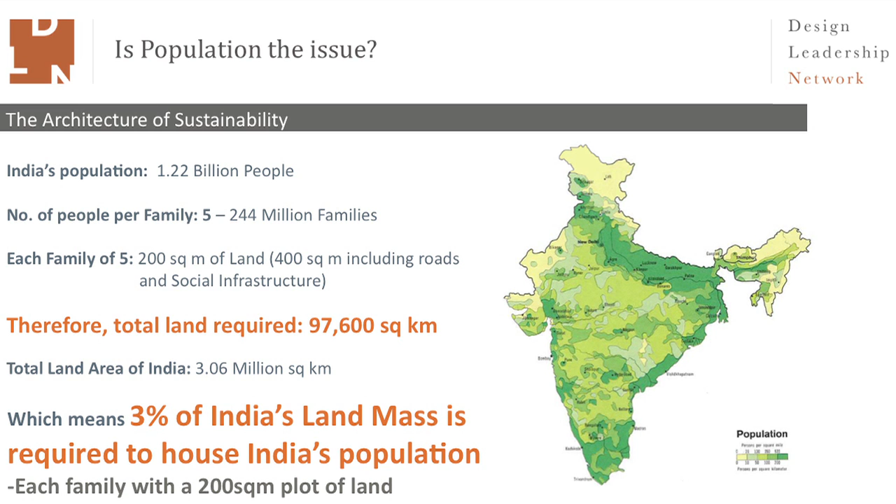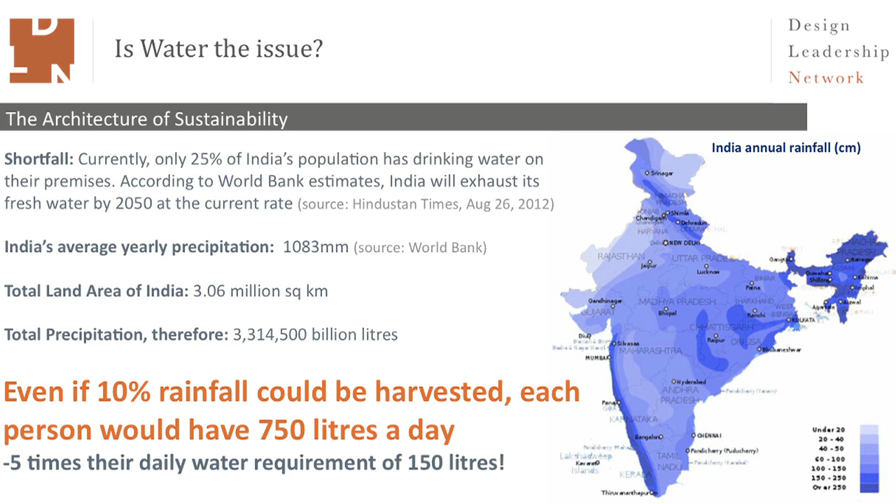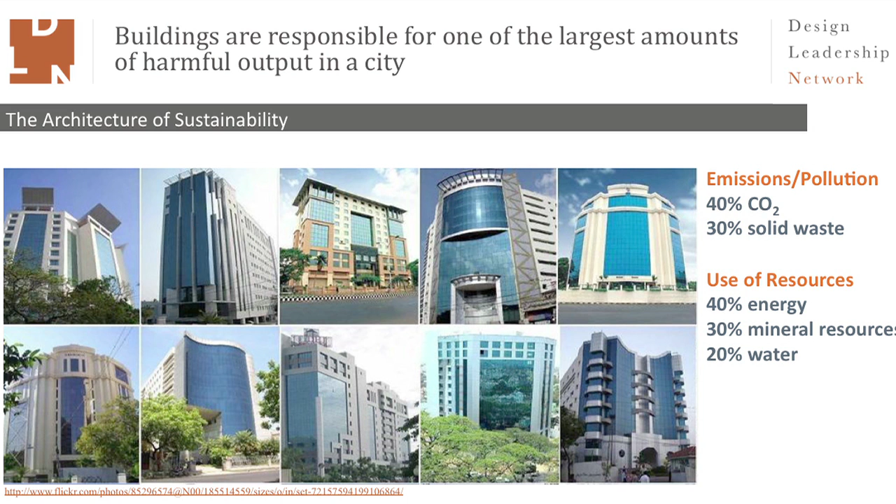India is a country where we have enough resources, enough land, lots of people, as you all know, and yet somehow we don't seem to have enough in our cities. What we build today are some kind of mental imagery of what is really required for India, and I'm not entirely sure where this confusion comes from, because this is not what we did in the past.

We've had traditionally an architecture stemmed in our history, in cultural context, and materiality which has emerged from the region, because in India traditionally we've always had scarcity of resources for the common man, at least.

This is the architecture of Morphogenesis. This is something where we build sustainability as the backbone of all our design thinking. We take standard acceptable norms of good green architecture, and we mix it with our understanding of what was green architecture when it wasn't termed green architecture.

We look at what the aspirations of the global Indian are today, and what is the affordability that is desired of our architecture today, and what is the imageability, and what is the image that a global Indian is looking to project. Using all of that, and keeping sustainability as the backbone of our thinking, we build buildings.

The first one you see on the left is Pearl Academy of Fashion, which is a hybrid building, a typology mostly available in developing nations, which is not mechanically centered on air conditioning. And then some of the other buildings you see are modern day requirements of a global India, which has corporates, IT buildings, and research centers.

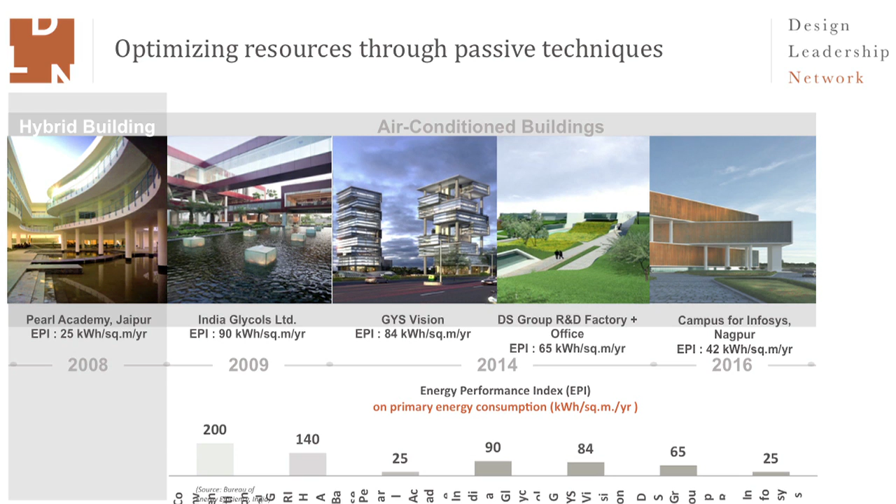And in all of those, you'll see those little blocks at the bottom. We consistently try to bring the energy used by the building down to much below the acceptable green standards. So this is the Pearl Academy of Fashion, Jaipur.

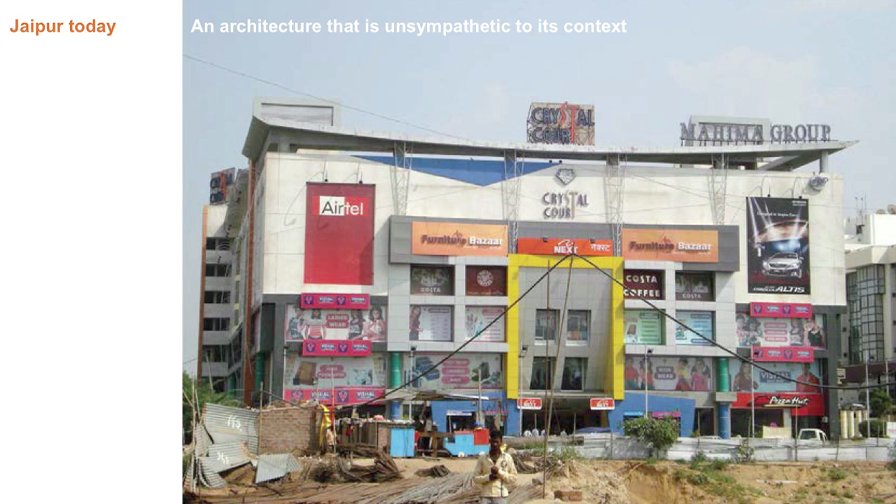This was a project built for less than $300 per square meter, based in Jaipur, in Rajasthan, where most buildings look like that today. This is the Pearl Academy of Fashion.

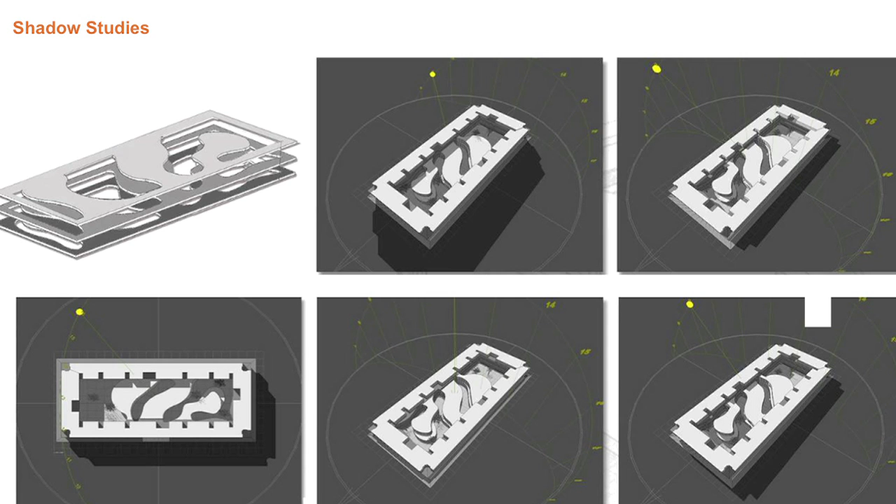This was built on basic passive design principles, using traditional typologies like a second skin made of what we call jalis in India, essentially perforated walls, and using subterranean water collection—architecture which has a term called baoli, where in this extremely hot climate, rainwater was harvested subterraneanly and stored for use, as well as shadow analysis, because this is one of the cities that touches 50 degrees centigrade in the summer. So shade is very important, especially considering it's a hybrid building.

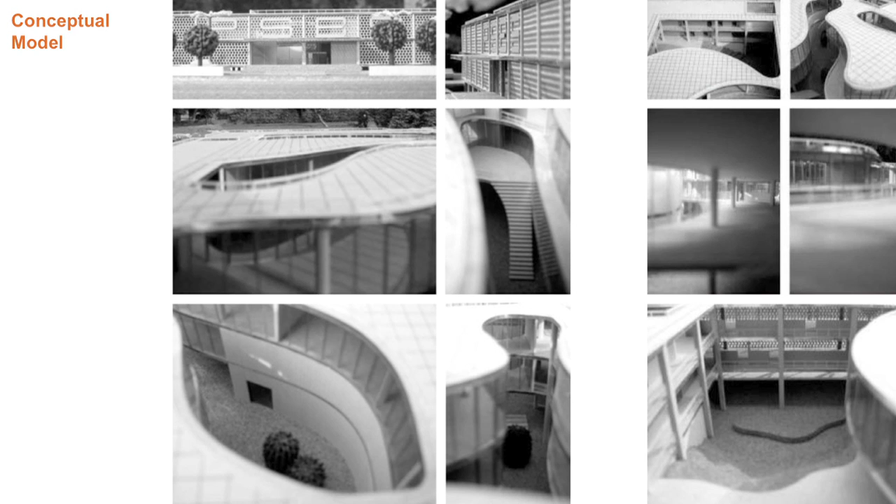These are some of the images of what a fairly rectilinear facade on the outside breaks out into a playfulness, which is intended in one way and generated in another.

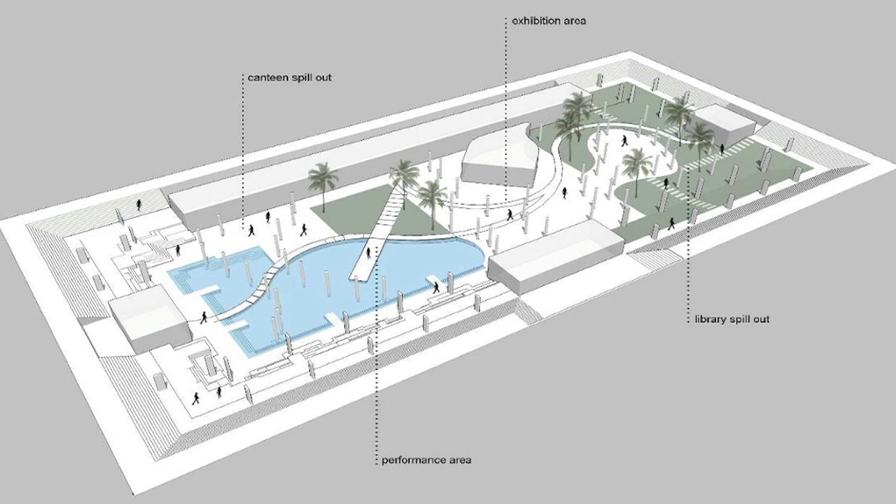These sections show the baulis that I talked about, where the incident water on the site is collected, as well as the sewage treatment plant water is recycled and brought to the base. Evaporative cooling is used, and this is the base of the building, so the entire building is kind of floating above a subterranean water collection point.

These are traditional insulation techniques. Earthen clay pots are used for insulation, which brings the temperature substantially down, not just a couple of degrees, but maybe 10 or 12 degrees. So it does the job of air conditioning. This is an architectural section that shows how earthen pots are used.

This is what the fenestration does, in addition to being the second skin, and also the sewage treatment plant water comes down as drip irrigation on the cementitious second skin, but it also creates interesting opportunities to work with shade and light. That is the building just before it was handed over.

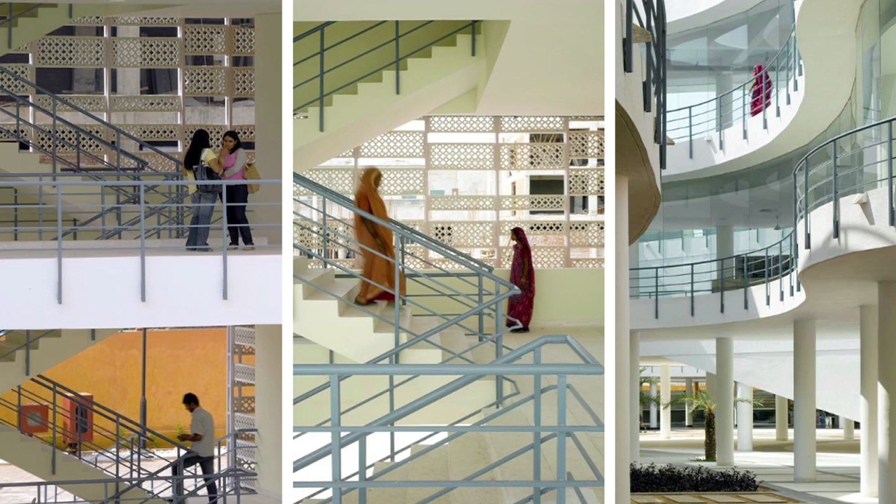Various images, very simple building, paint and plaster, cementitious jalis, all material sourced within 200 kilometers. Stone that was used very sparingly is all local to Rajasthan. This is an image of the water collection point at the base of the building.

And this is the bauli, which is the traditional step well created to save water. Normally, because it's so hot, there were places for social interaction created along it, so people can sit and by the use of evaporative cooling, also achieve a certain amount of thermal comfort. And as you see, it starts to get used.

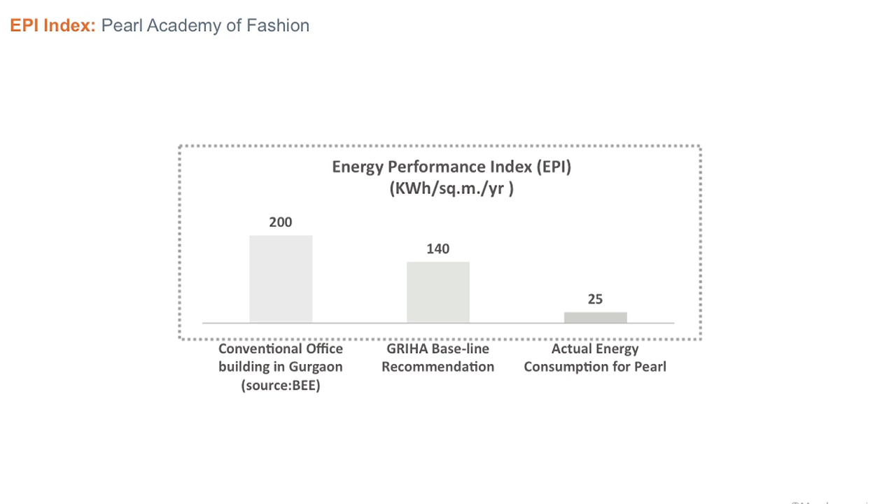And the energy EPI achieved is only 25, whereas the acceptable green norm in India is 140.

This is a completely different kind of building, for the modern day typology which did not exist 20 years ago. This is an IT campus. Infosys is a company that most of you probably heard of, it exists in America as well. These are special economic zones where people go in for several hours of confinement to the office building, and they are IT software programmers. These are usually located just outside a city because they are so large, almost like little townships themselves.

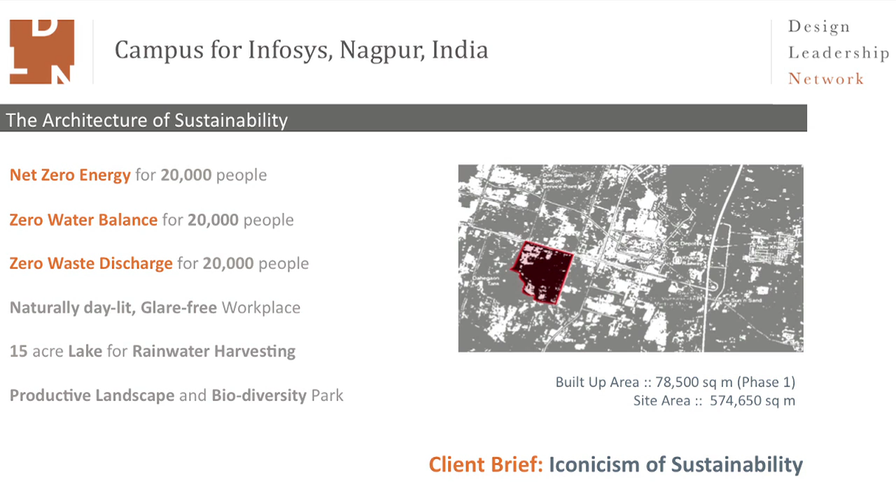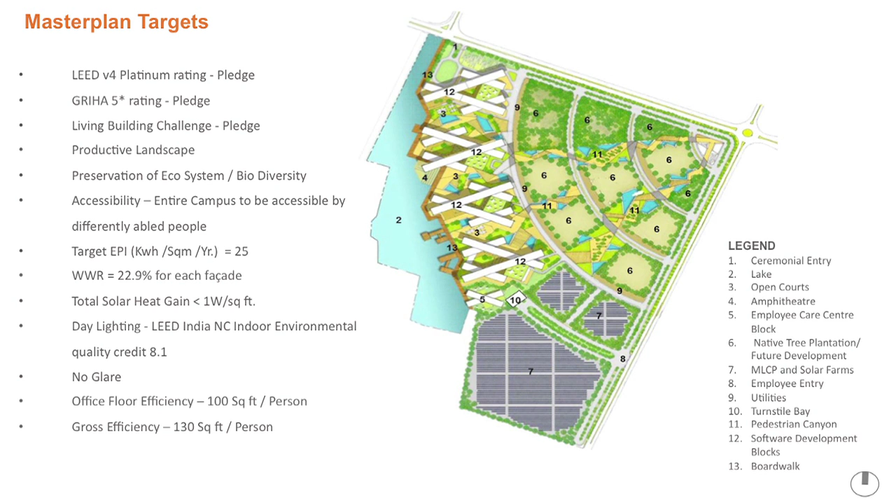Now we set out an agenda to achieve net zero energy for 20,000 people, zero water balance for the same number of people, and zero waste discharge into the system. So this is a master plan for 140 acres. We took advantage of the fact that it's located on a slightly sloping site, and all the water from the site was drained into it, which is then recycled and used for the entire 20,000 people.

So the form of this building came out of creating one ideal block, which was naturally daylit, glare-free. Using the 22.5 degrees north location on the tropic of this site in Nagpur, also rotating each of the blocks by 22 degrees on either side, we created a self-shaded kind of building, which is 100% daylit and 100% glare-free.

A lot of simulations were required to convince the engineering, all engineers in Infosys, but it passed through their grueling tests, and it's under construction now. So there are 4 of these blocks that sit on the edge of this man-made lake.

And the entire landscape is also a biodiversity park. There is a lot of diverse flora and fauna of this region, which has been used so that they do not use up extra water. So the landscape designing was also very crucial to achieving the result that we hope to achieve.

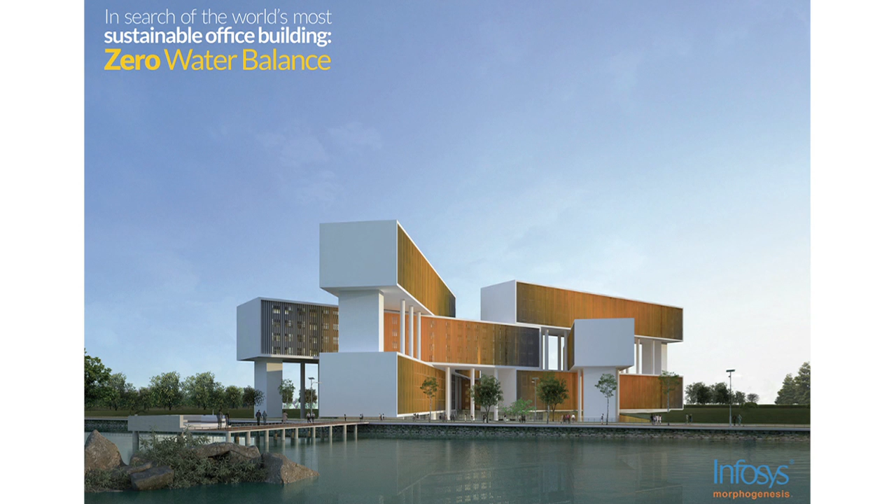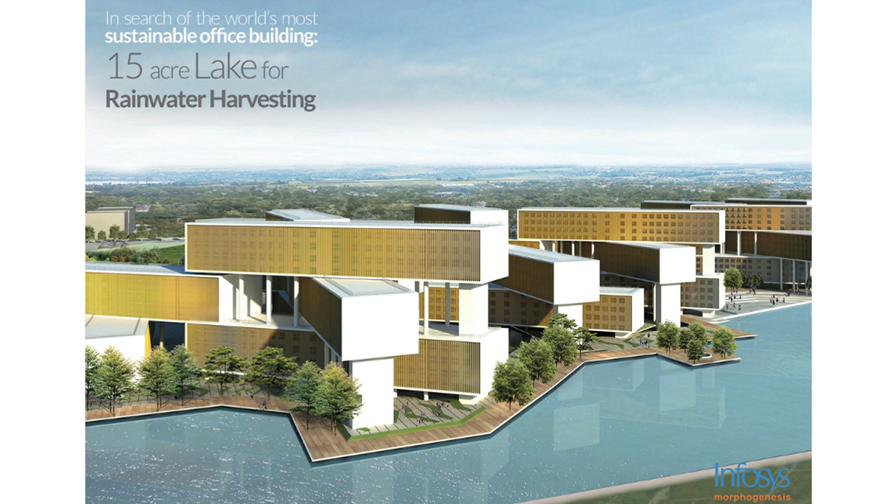So all the water goes into this and then gets recycled back into the building, so there is no water wasted. And that is what finally, when all the 4 blocks of phase 1 are up, that's what the building looks like. And this is an image of the rainwater harvested lake, which is at the base of the campus.

This is the third kind of project that I said we really do and passionately believe in, which is giving back to our city. This country has given us a lot, other than the fact that, of course, we are Indians, but it's given us a lot of opportunity in the last 18 years.

We have had fantastic projects to work on, starting from small art galleries to large IT campuses, to building cities. Literally, we build a city or two every year. We get a commission to do that. So it's given us so much opportunity.

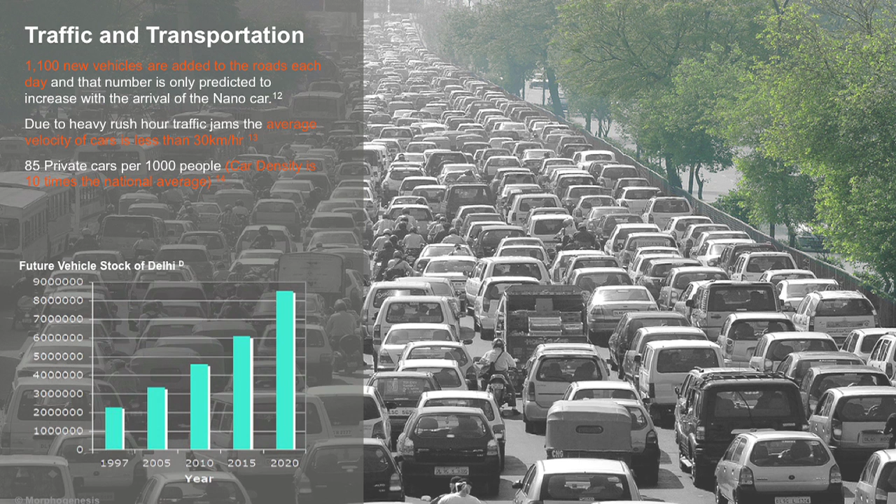So a couple of years ago, we started this program which we call Delhi Nalas. Nala is the name given to an open drain. An open drainage system was what drained all of Delhi historically. It was put together by the Tughlaq dynasty, one of the dynasties that ruled with Delhi as a capital. It connected all the monuments of Delhi, because the monuments essentially came up where there was water available, and then finally connected to the river Yamuna, which was the water source for entire northern India.

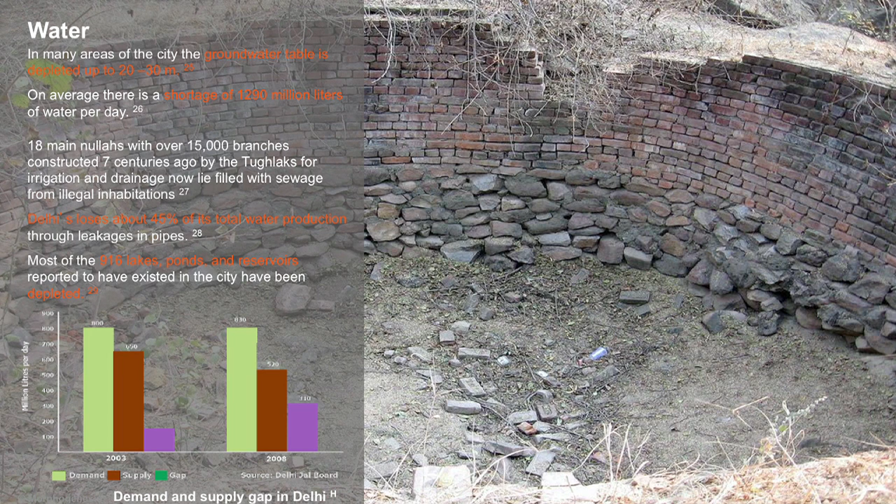Now most of these are either like this or like this, and these are not rare. When you walk through Delhi, this is what you see. And because essentially it was a drainage system of the city, it is everywhere, it drains the whole city. With 50% of the city's sewage going from slum areas, which are unplanned, directly into these, we have a huge issue.

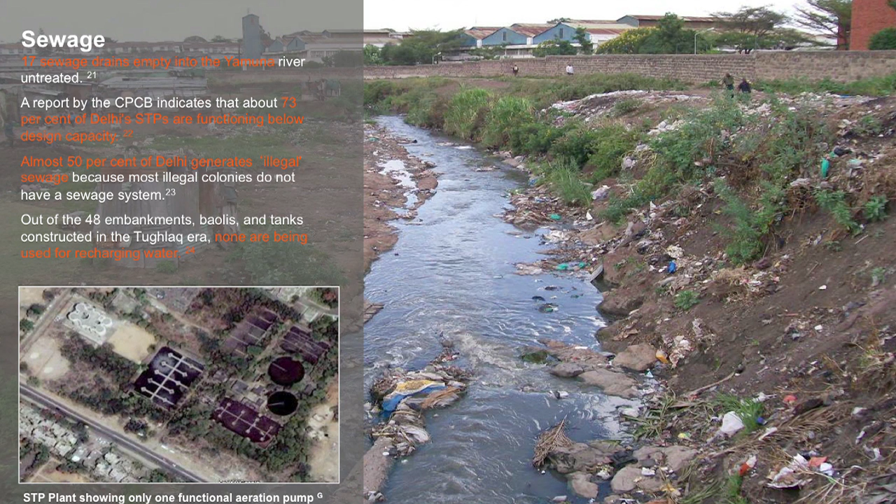And so we started an advocacy program where we talked about it. We collaborated with other professionals that understand water a little bit better than us, and landscape architects, environmentalists - of which Manit is also a trained environmentalist, so perhaps that's where our interest in this started.

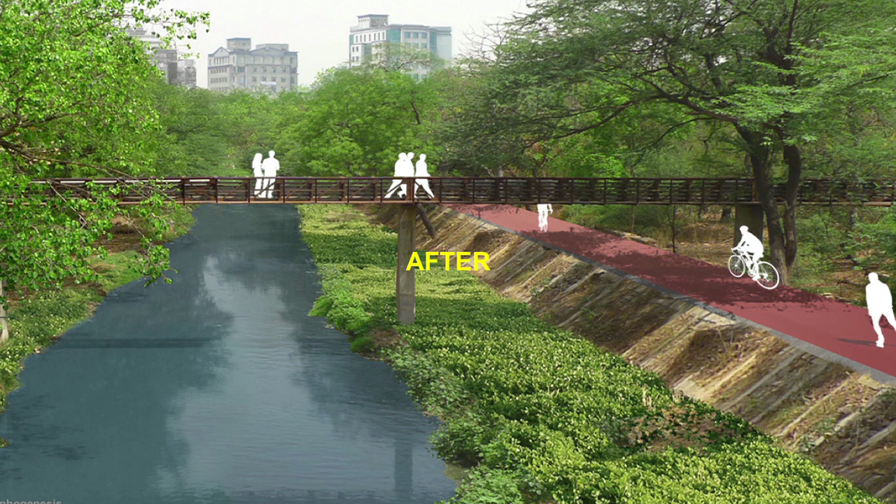Just simple exercises like this, just to see - this is the before and this is the after, really simple. We talked about creating an alternative walkability plan for all of Delhi, which is not making people walk along traffic. Because Delhi is a very green city - we have a very large percentage of the city under parks, but somehow it's never seen. So we try to advocate an alternative walking and cycling route so that people are not walking along pollution.

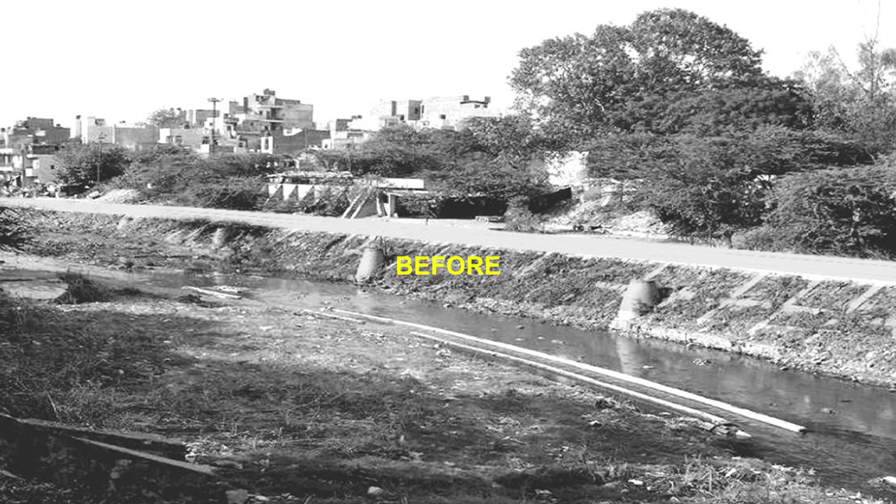So these are some of the slides and images we put together with our team, and this is the after. Now, this would ideally connect every metro station, every train station. It would be every cycling point, cycle from point to point, and it connects every monument of historic value in Delhi. So it would really be the touristic map that, when all of you visit next, hopefully in a couple of years, you will be walking along.

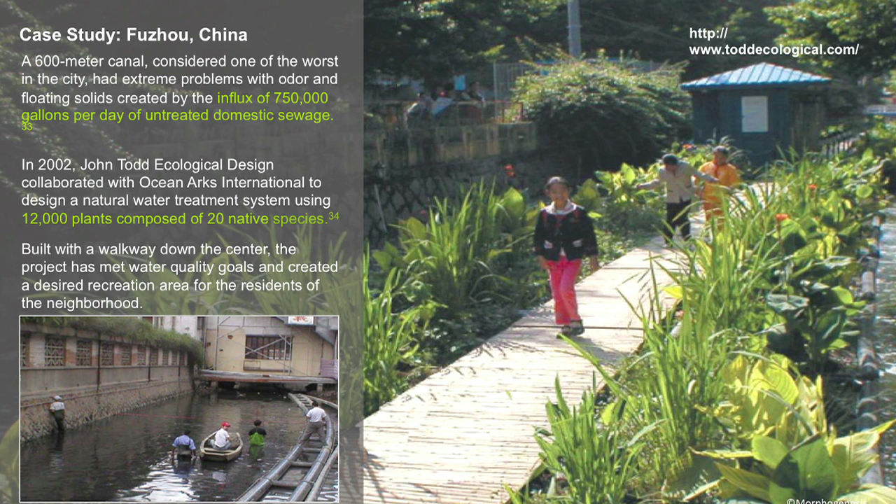We looked at various examples of this. It's not a new thought - we've seen many examples where this has been successful around the world, in India, in South Korea, in China. So why not in Delhi?

This is why not in Delhi - there are these many agencies that we had to talk to. It was, in fact, like Dorothy talked about working with a spouse. There was a point that our son started to say that he doesn't need to do any social service, because my father does enough for the whole family - because this is what we were negotiating, and he was there representing this in all these different agencies, trying to get them to work together for the Delhi that we dream of.

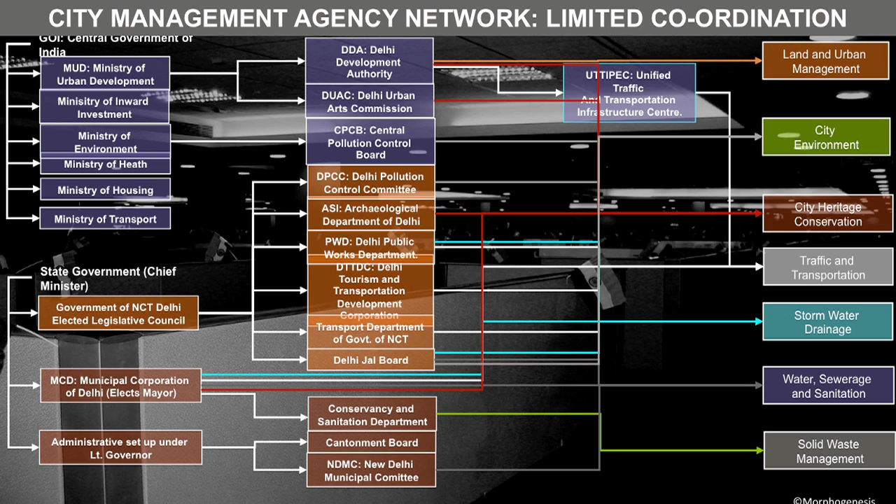However, this is part of our advocacy. It was every single day - writing, talking, and through websites, creating momentum, through coordinating with various agencies. And we got a lot of powerful bodies to support us.

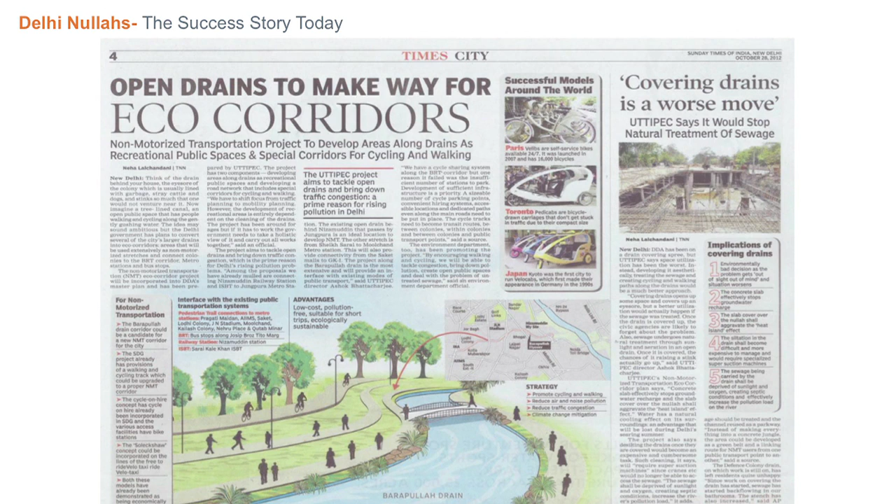And finally, this one document - it looks kind of hard to read, but what it does is, here, this is Delhi's current policy: open drains to make way for eco-corridors. And this really is a dream come true for us. It's unbelievable that we set out to do something, and today it is part of Delhi's policy. Hopefully when you all visit Delhi next time, this is what it will look like - not like the image I showed you earlier. Thank you.